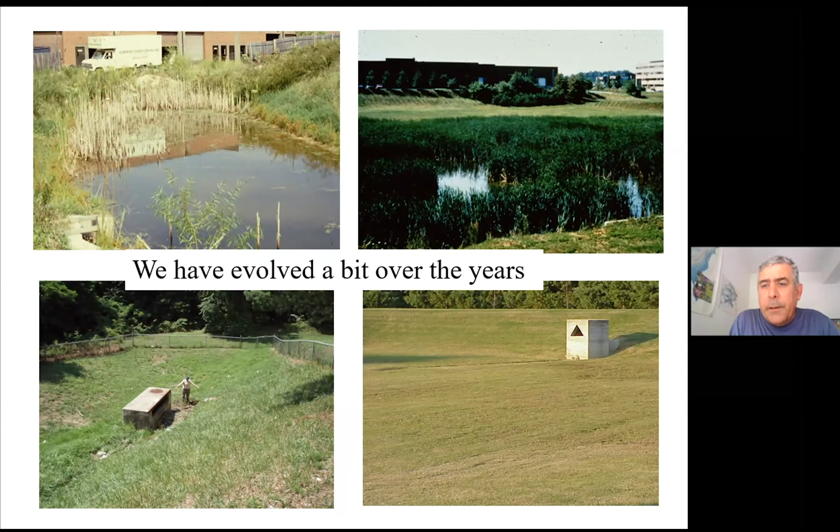My creds, when it comes to stormwater, I was involved with many other colleagues in putting together the Minnesota Stormwater Manual back in the day.

We've also worked on the Maryland Manual, Delaware, West Virginia, Seattle, all sorts of places around the country, even in New Zealand.

And this is one of my favorite graphics. It's kind of the unified stormwater sizing approach that we advocated for Minnesota, with different volumes for water quality, channel protection, and overbank and extreme flood protection.

If you look at it really closely for too long, it goes back and forth. It's like an optical illusion.

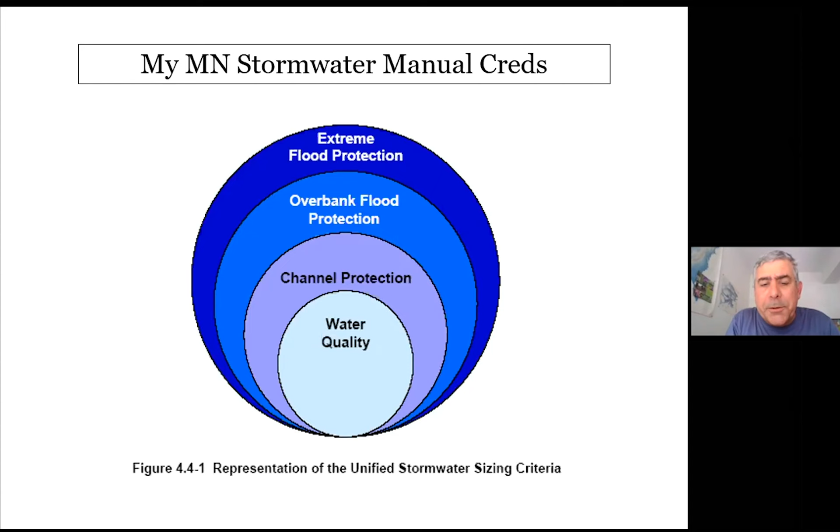So anyway, what prompts us to revisit our design standards every decade or so? It's kind of interesting. We generally change our landscapes or even refurbish our living rooms at the same basic pace, about once every 8 to 10 years. There's a lot of reasons for it.

Often we need to update our sizing criteria, that we get new design storms to reflect a better rainfall record or better forecasts, and a shift to more precise engineering models.

It's also the opportunity to incorporate new stormwater practices and fix problems with old ones, and renew the arguments about how much quality versus how much quantity.

Whether we want to promote infiltration everywhere or deal with the failures of some infiltration, whether we want to increase the size of the contributing drainage area or reduce it.

And generally, a lot of the decisions that are made in the manual writing process reflect our dissatisfaction with our stormwater product that we see out there.

Facilities that are hard to maintain, facilities that don't seem to be performing their water quality function, and facilities that just don't look aesthetically appealing.

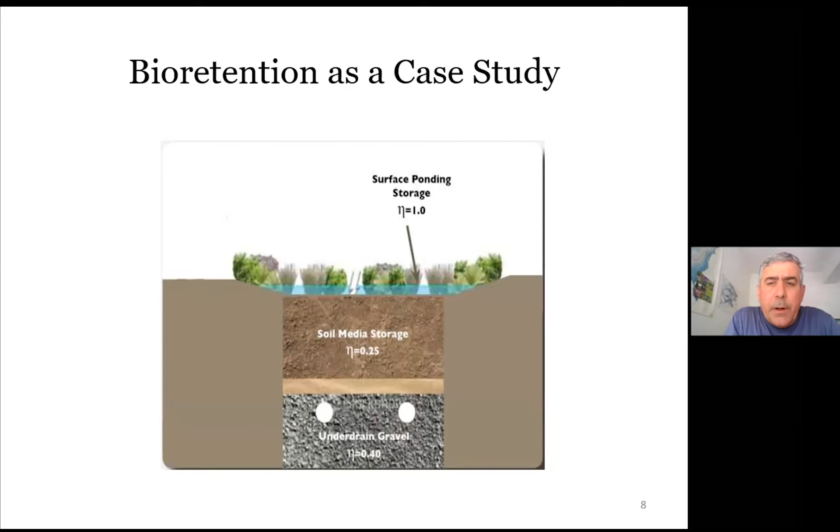And we've also had opportunity to do a good amount of research on it. Our research in the last few years, we understand a lot more about bioretention.

It was really just a black box when it was first introduced in the 90s and even through about 2010. But now we have much better information on how much runoff reduction it produces on an annual basis in terms of the volume reduced.

We have much better data on pollutant removal, and in particular, the components of bioretention that increase or decrease performance for different kinds of pollutants.

For those of you who know us in the Chesapeake Bay, we are incredibly nutricentric. We worry a lot about nitrogen and a lot about phosphorus, and that's our primary goal.

But we've also learned about how they're good at removing trace metals, toxics, sediments, and others.

On the other side of the ledger, we have our operational experience, which is the experience that we've seen of the product out on the ground. And we find which design elements are problematic.

We do more inspections now and find consistent problems that turn up in application after application. When we look at the entire cycle from concept to construction, we find there's certain steps in that cycle which are more critical or at least more prone to failures.

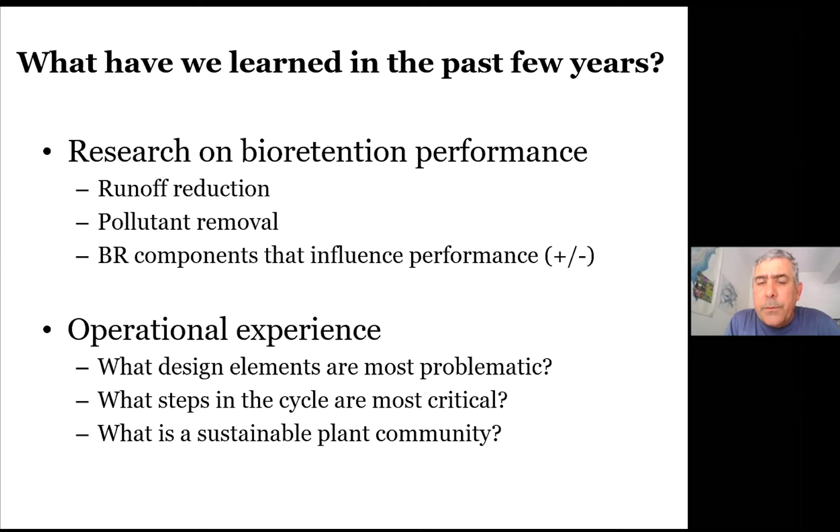Just to amplify some of the points, I think the big shift in the last round of stormwater manuals was the adoption of runoff reduction targets and the notion that our ability to infiltrate, evapotranspire, or filter over a long time can really reduce annual runoff volumes by 40 to 70%, depending on the underlying soils. And that is really driving the pollutant removal performance and the operational performance of bioretention and all of the similar practices.

There's also been quite a bit of work with upturned elbows and internal water storage zones that can further boost how much runoff reduction occurs at the bottom of bioretention areas. And that was a little bit of a wild area 7 or 8 years ago. It's now pretty well accepted, and it's been implemented in a majority of new projects, but has yet to go into the specification where it's required. So that is probably something that will be a major focus of our next round of improvements.

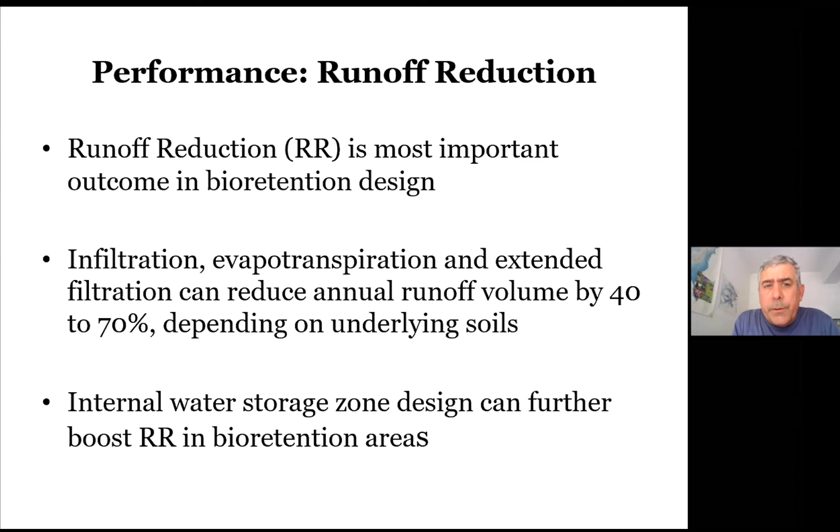The other thing that we've learned, and this is a slide I borrowed from my colleague Allen Davis at the University of Maryland, who will not be playing Michigan State this weekend, which is breaking news for us because of COVID.

But the issue with bioretention, and for that matter almost all of our traditional gravity-driven BMPs, is there are not a lot of mechanisms outside of denitrification to get a lot of nitrogen removal in our standard design. What we end up doing, the research shows, is we shift or repackage the forms of nitrogen back and forth. But until we get it into nitrate and then have denitrification occur, we don't get reliable nitrogen removal. So a lot of our design efforts are trying to figure out how we can provide a more reliable environment for denitrification to occur.

And realizing that in the upper Midwest, nitrogen control is probably not as important as phosphorus control, it may not be as big an issue as it is for you. But for all of our urban BMPs in our bay restoration effort, it's really tough to get the nitrogen out.

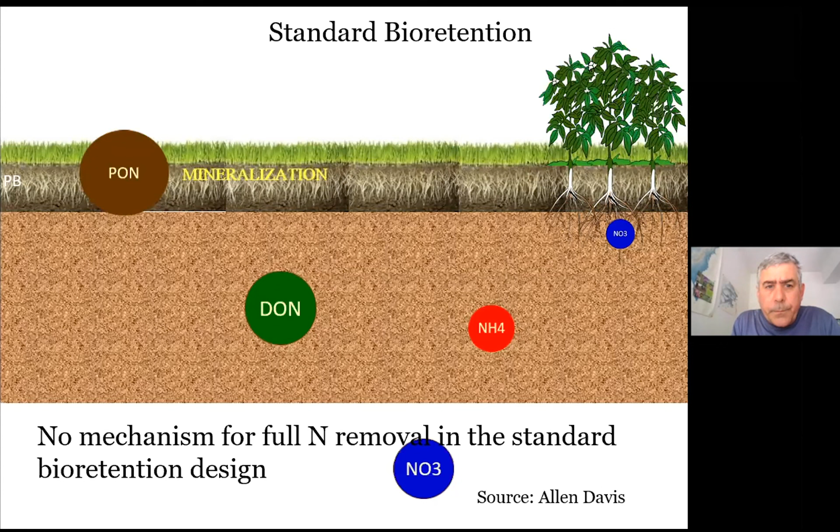And there's been a lot of work on alternative media recipes for bioretention and other practices, including sand filters. The current media recipe for us, which is about 85 to 88% sand, meets our performance objectives, but there's been a great deal of work, much of it inspired by work from Minnesota, adding things like biochar or wastewater treatment residuals to see if we can boost the performance. We call them performance enhancing devices. And the boost in removal rates is usually greater for phosphorus than for nitrogen.

And so this is probably an area where our next generation of specs will have more media complexity in their recipe to add some PEDs. The main limitation to moving forward on this is the reliability of the supply of the PEDs to the contractor community. Until they show up as hard and fast requirements in specs, there's not enough of a market to produce them in the quantities needed to be cost effective and applied across.

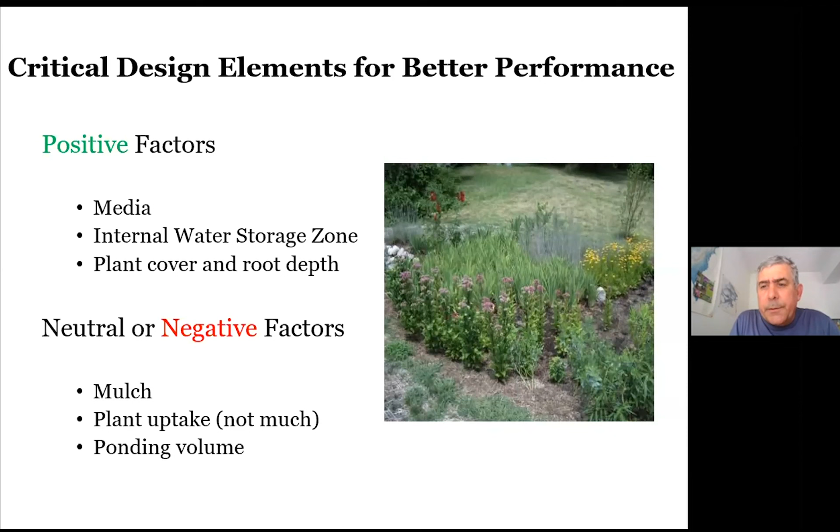And then, of course, we all have our collection of knucklehead designs. Mine are drawn from around the country, but we're still trying to figure out how we squeeze in stormwater and get the performance. And so those kind of design specs and limitations and setbacks and so forth need to be re-examined and in some cases be made more mandatory.

The big choice whenever you write a stormwater manual is whether you use the word should or use the word shall. If you use the word shall, it's interpreted that you've got to do it. If you use the word should, yeah, I'll do it if I want to, but in most cases, I'll go for a lower cost alternative. So making those choices, I think, is something that will go.

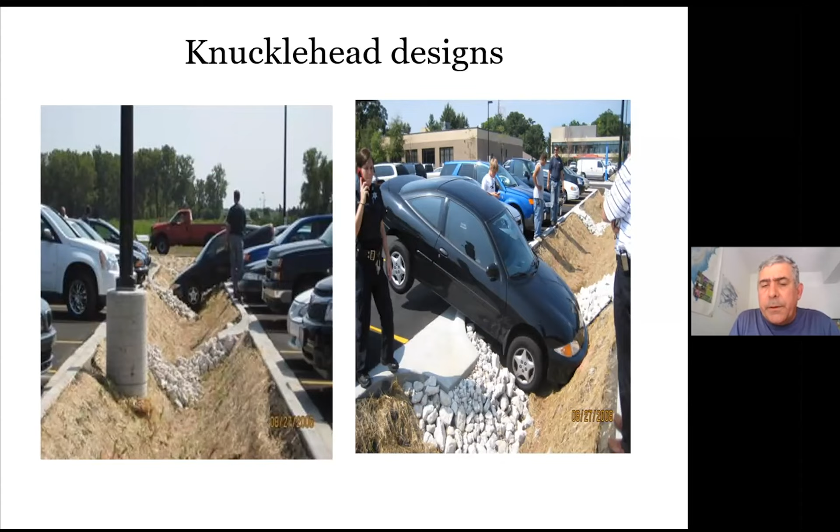But the one thing that we're promoting is a kind of a full cycle approach where we look at our monitoring data and try to assess how they're functioning, set forth performance standards for what we want our facilities to achieve, then outline the more specific design criteria that lead to meeting those standards, to have more specific construction techniques as we shift over to, particularly with bioretention, more of it being constructed by landscape contractors and not our traditional big civil firms.

We're looking at more numeric inspection criteria to basically trigger whether a facility passes or fails, and if it fails, what specific maintenance tasks need to be done to restore its performance, and when it totally fails, the makeover stage to recover its performance, in many cases just redoing the practice.

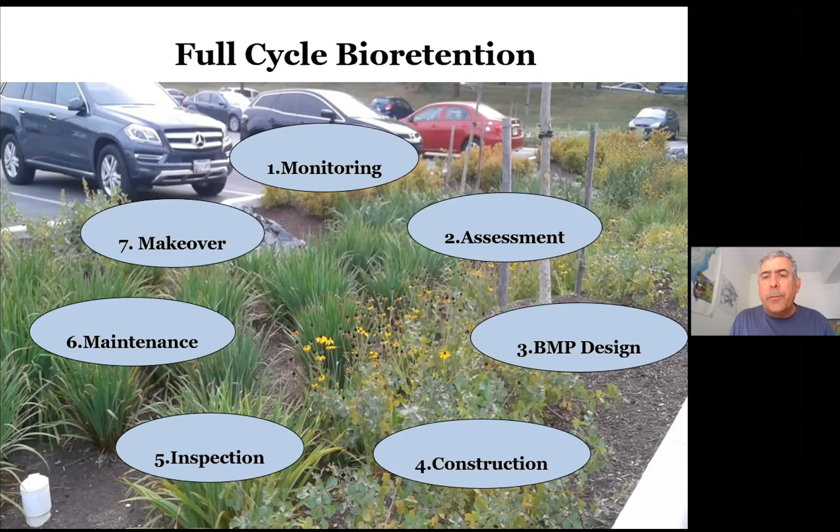And the whole concept of a sustainable stormwater practice is that we can say, like a sewer line or a drinking water treatment system, how long will this last? Will it last 50 years and still perform? And I think the big question for many of us, and it's not a big secret, is our practices may physically last for 20 or 30 or 40 years, but their performance may disappear after 10. So we need to look at the duration of performance as a key metric of sustainability.

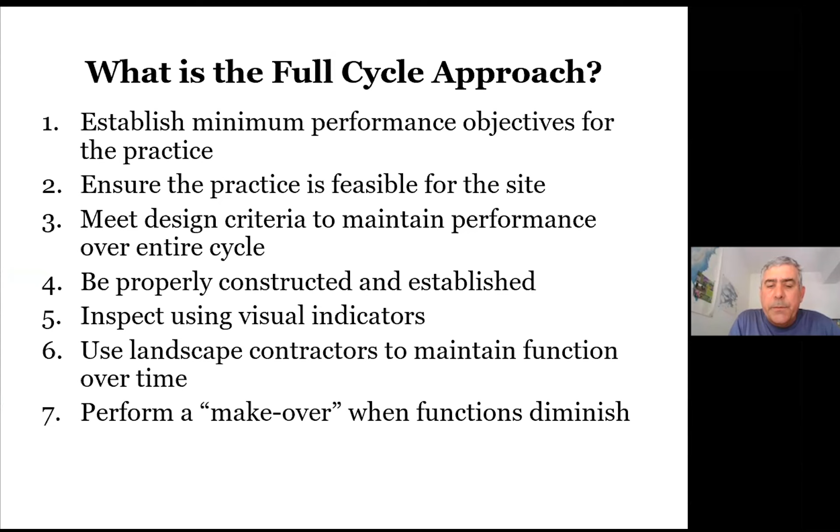So anyway, just writing what I was just talking about: establishing minimum performance objectives that control design, have specific metrics for practice feasibility, have design criteria that are more weighted to maintain that performance over the entire cycle, using landscape contractors to maintain function over time, and then what do you have to do when the functions diminish to do a makeover to bring the facility back into compliance.

So some of the targets, and I think this is where the arguments about the next generation of design come into play, is we want to consistently achieve a numeric performance standard. For example, with runoff reduction, that we would like at least half of the stormwater volume going into the bioretention area on an annual basis to disappear, either into the ground, into the sky, or well after the storm event is over.

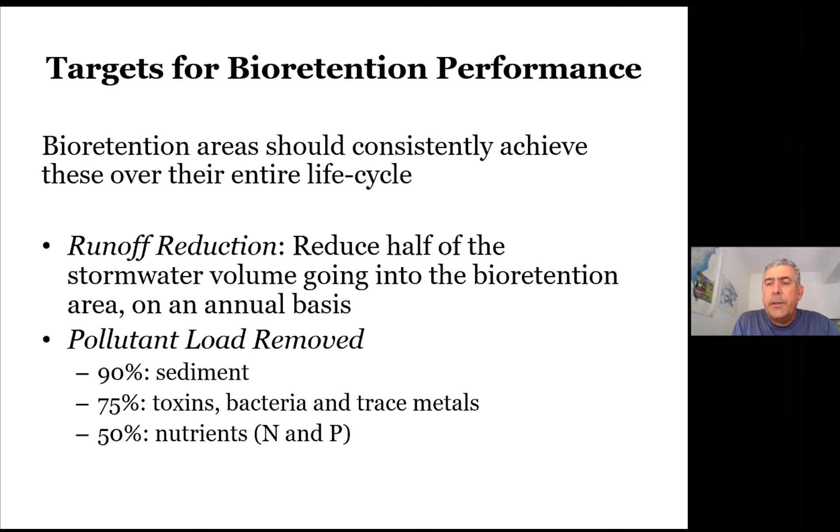In terms of pollutant load removal, we feel we can get the following removal rates, which really haven't changed that much in the last 10 years, but I think the one thing we have discovered is we were concerned about the possibility for release of nutrients and even trace metals, but it does seem that the material is being locked up, and so hopefully over 20 or 30 years, the pollutants are accumulating but not leaving the facility.

Some of the more prosaic performance targets: we want plumbing that can last a decade or two without failing. It's things like underdrains. We find consistently the inflow to bioretention areas, whether they're curb cuts or something else, is a critical point of failure in many, many, many facilities. We want a sustainable plant community that can withstand Minnesota winters, improve practice function, and create some legitimate habitat, even if it's just for pollinators.

We've come to realize that there's not a maintenance fairy out there, that we have to figure out as a society how we maintain LID practices. And what we've come to in the Mid-Atlantic is a reasonable maintenance burden that can be handled by trained landscape contractors and not necessarily hardcore engineers.

And as I've mentioned before, numeric triggers to define failure and require makeovers. I think we've been doing this for long enough where it's time to insist and impose those the same way you would have in a drinking water or a wastewater system.

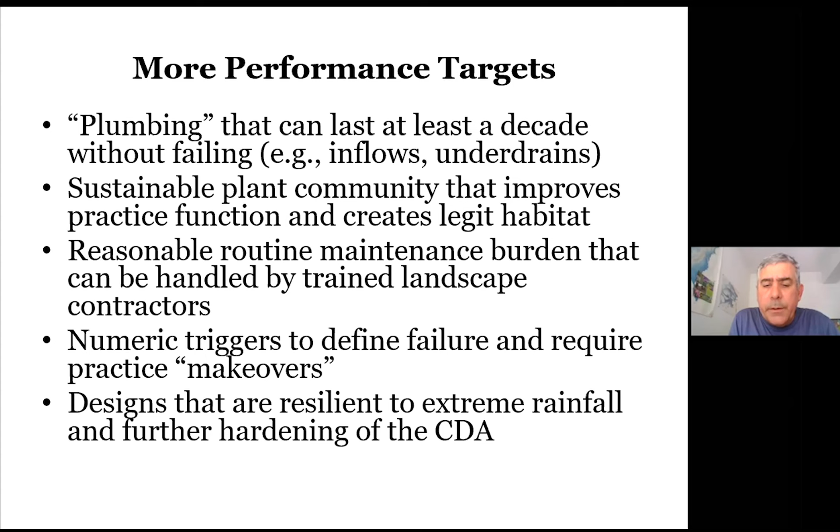So the visual indicator approach is a rapid way. We've been putting a lot of numerics on it. Our website, www.chesapeakestormwater.net, has a lot of resources for it. I won't belabor them this morning.

The one spec, though, I think that comes out is coming up with a bioretention inflow method that works and can be easily cleaned. Perhaps some kind of pre-cast concrete curb inlet that prevents erosion at the entry side slope and reduces flow velocities to non-erosive levels in the bioretention bed.

I think that is a piece of standardization of the plumbing that would be very welcomed by the design community and the construction community, and would eliminate about 30 or 40% of the observed maintenance problems out there. So for some graduate student, getting a Nobel Prize in bioretention inflow would be a great way to go.

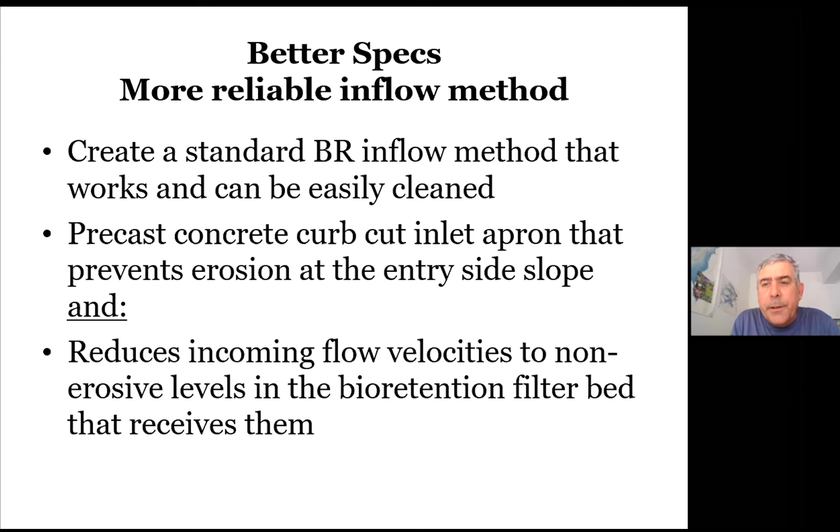Better specs for landscaping. We're sort of torn on the mulch tree model, as I mentioned before, and the landscaping objectives and invasive plant species, and how do we maintain them. And I think we never really invited landscape architects to the table on this, which is something we should do in the next round. But we want to have sustainable landscaping templates that are easier to maintain and require less mulch.

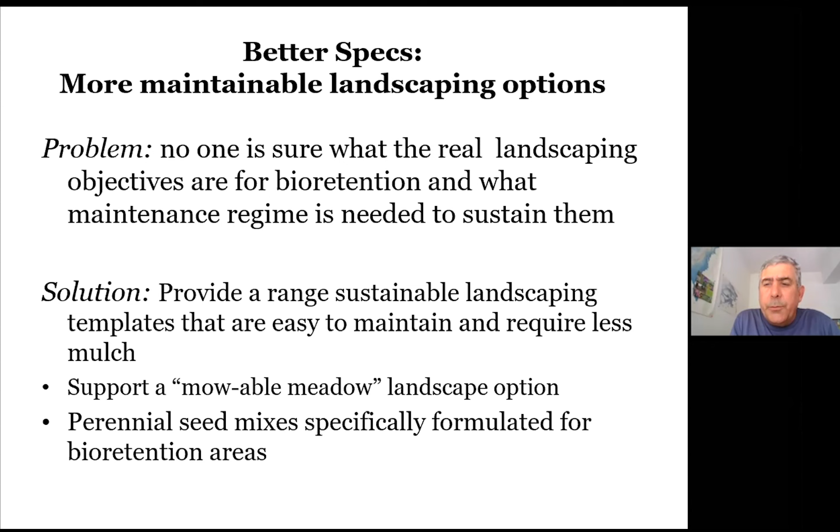I've been shifting to what we call a mowable meadow landscape that is seeded with perennial seed mixes formulated for the rather dry conditions in the upper levels of bioretention areas, and that grows up and is mowed roughly twice a year, making the maintenance a little bit easier than having to weed, replace mulch, and so on.

And again, the biggest post-construction maintenance cost traditionally has been mulch, and this is a way to do it. And we have to understand that our landscaping crews know how to maintain, they know how to mow. And so that's something just to throw out there.

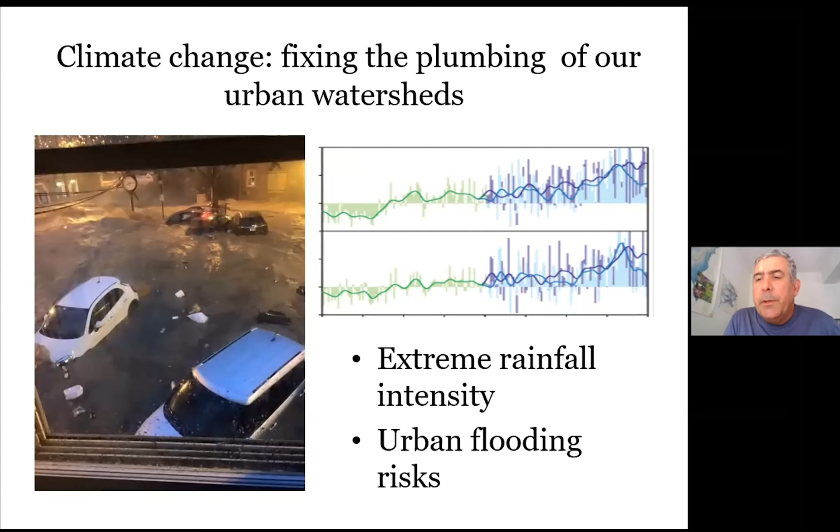Urban flooding has really increased in the public's eye in the Chesapeake Bay and elsewhere. How do we manage that? We've always tried to manage a lot of different kinds of storms, but I throw this slide up on the right-hand side. You can see in the Bay watershed, there's a very large increase in very heavy precipitation. It's sort of similar to what you have. I think you're at 37%, we're at 71%. But that's probably the big climate change thing that we're focusing on the most.

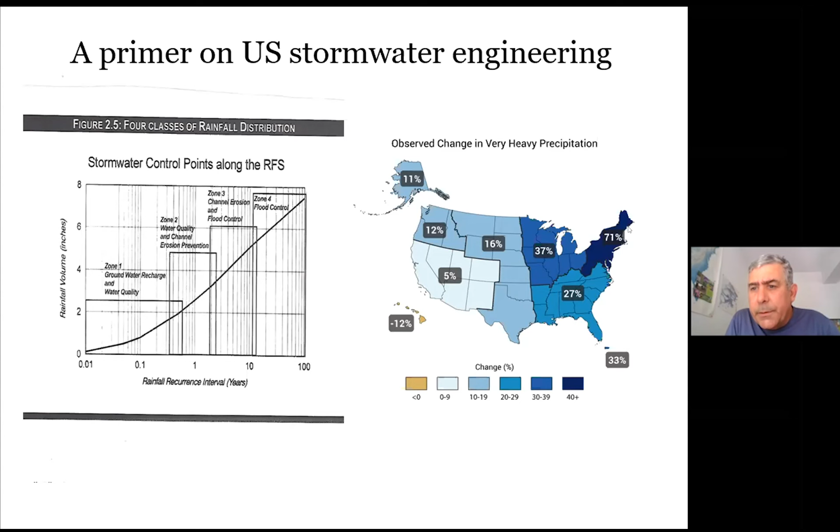And I'll turn it over to David to bring this home. But just in closing, I think we have a lot of great opportunities to clean up our profession, to produce better product, and we just need to get back and do it the old-fashioned way, which is to work together to improve our design criteria to make those sustainable stormwater practices. So with that, I'll stop and turn it over to David.

Thanks, Tom. So I'm going to kind of pick up where Tom was leaving it. I'm going to talk a little bit about what we're looking at in terms of climate change conditions and how that might impact our stormwater design moving into the future, the way that we're approaching it in the Chesapeake region, and then talk a little bit about some of the other practices that we're using outside of sort of the traditional stormwater BMPs in order to meet some of our pollutant reduction goals in the region.

So, as Tom mentioned, we are tackling how these changing climate projections are going to influence the way we design our BMPs to make them more resilient. In our region, we have done a number of analyses. The Chesapeake Bay program did a pretty extensive climate assessment last year, and we've been working to compare that with the findings from the Intergovernmental Panel on Climate Change, the National Climate Assessment, and some other local university studies. And there's pretty good consensus that we're looking at 2 to 3 degrees of warming in our region by sort of the middle of the century.

Similarly, we're looking at between 1 and 2 feet of sea level rise by that time, including influences from sort of blue sky or sunny day flooding, tidal flooding, which has increased by a factor of 10 over the last 50 years or so. On the precipitation side, in terms of overall increase in volume, we've got a projected 6.5% increase in precipitation volume by middle of the century, sort of as a Bay watershed-wide average in the Chesapeake. But the intensity of those storms is also increasing.

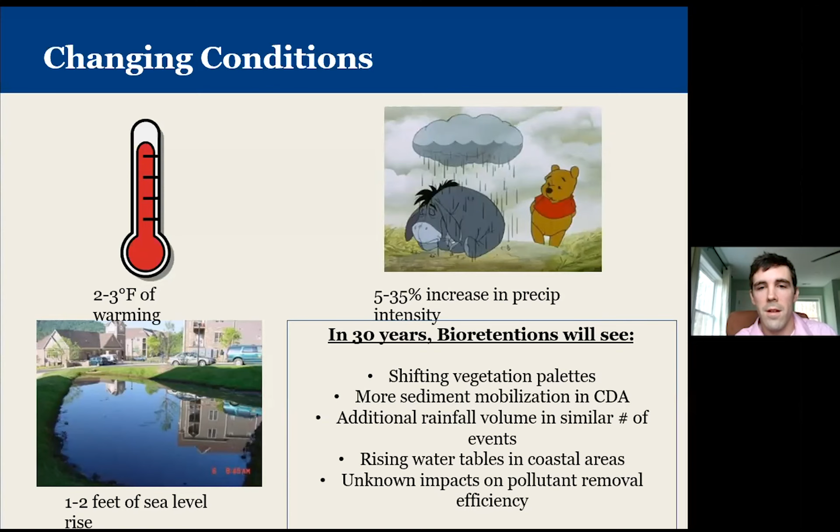So what we're doing right now, Tom, if you can go to the next slide, is looking at vulnerability of our practices in particular as a way of trying to understand how we can improve design into the future. If we can, I don't know if it's a lag on my end or.

Okay, thanks, Tom. So, we're looking at our practices again, using sort of our upland LID or bioretention practices as a case study here. Where are the practices vulnerable as we move into the future to climate change? Because a lot of these practices are already being subjected to conditions that are making them fail even under current climate conditions. So, in that sense, their risk is relatively high.

Bioretentions are a relatively needy practice when it comes to maintenance, whether it is existing design flaws related to an undersized practice or short circuiting of the flow through the system. Maybe it's a curb cut that was undersized, so you get kind of a fire hose effect coming into the practice already. They are already facing challenges that are most likely to be exacerbated going forward. And our online practices that are sort of within that natural flow path, they're going to be the most susceptible as they kind of face the brunt of those additional flows.

We're looking at, in particular, erosion, both at the inlet and the outlet of these practices as being particularly vulnerable to these increased intensity events. Or perhaps, depending on the design, bypass or overflow becomes a concern when we're looking at what their performance is able to achieve. If we have more rainfall, but it's being concentrated into the same number of events, it increases the likelihood that a significant portion of that additional runoff is going to miss our practices altogether. It might protect them from some of those maintenance needs, but it might mean that we are now having more

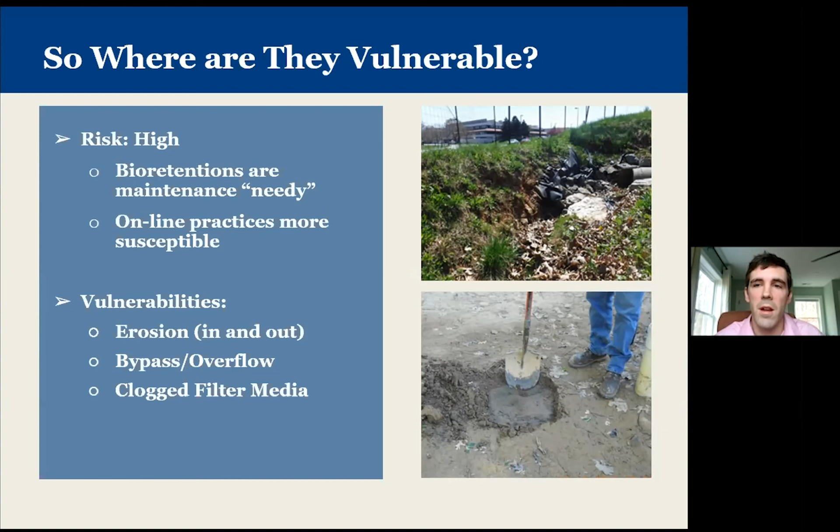untreated flow entering our conveyance systems and networks. We also expect with that additional sediment mobilization in the drainage areas to get more clogged filter media, depending on what the pretreatment conditions are. And again, some of these might just be loss of performance types of metrics in terms of what we're looking at rather than absolute failure, but it also is likely to increase kind of just those routine maintenance needs for these practices, which has already been a significant burden for a lot of our localities around the Chesapeake Bay watershed.

So we have a lot more work on this front that we've been doing at the Chesapeake Stormwater Network and through the Chesapeake Bay Program Partnership. We have a series of 4 memos that we've been working on. If you're interested in more details on this, 3 of them are out already. The 4th one will be coming hopefully in the next month. The first one is really, we went around and surveyed about 200 stormwater stakeholders across the watershed to look at what their real concerns and current management actions have been to address the resiliency of their stormwater practices, and condensed those findings into a memo to kind of lay out the needs for the program.

The second one really lays out for a lot of the kind of modelers and scientist folks in the Bay Program structure, what is the current stormwater engineering standards and criteria that are being used across the watershed. It's a very state specific and in some cases locality specific or department specific type of criteria. So understanding how those are set up and designed, what are the precipitation data that are being used to inform those designs, so we know what we're working with sort of from a regulatory standpoint.

The third memo pulls together all of the recent climate projections and research for the Bay watershed. It summarizes those temperature, sea level rise, stream flow data, as well as a series of 5 different downscaling studies that have been done for precipitation to try to lay out sort of the range of expectations and some of the methods. And then the fourth memo, which is coming soon, talks more specifically about those vulnerabilities for our BMPs. Sort of what are the elements that make them most vulnerable? What are the design components that we need to be looking at in that next generation design? And then hopefully that'll inform future efforts to kind of move towards better design criteria for the states, or at least a commitment or agreement to kind of look at ways to improve our practices in the watershed.

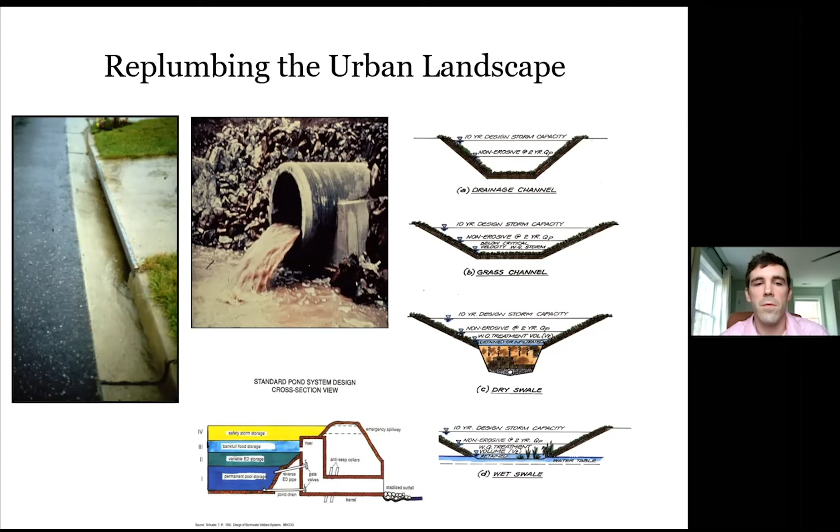We've been doing a lot of work to get localized or regional intensity, duration, frequency curves that are projected into the future, in case localities want to look at increasing the sizing of their conveyance networks or their stormwater practices to account for future precipitation. But there are also ways that we can look at media, those performance enhancing devices that Tom mentioned, to try to improve performance, to kind of make up a little bit of ground that maybe we're losing from some of our bypass or untreated runoff, as well as some of those inlet and outlet protection systems that we might be looking at, whether it's the precast inlet for improving maintenance or creating a little more standardization, or what we need to be kind of looking at some of these methods so that we can figure out a watershed-based approach to improve our resiliency.

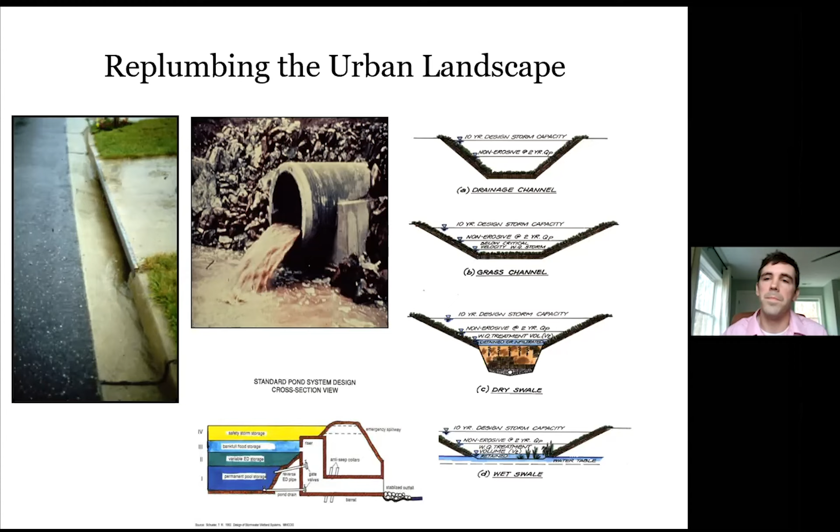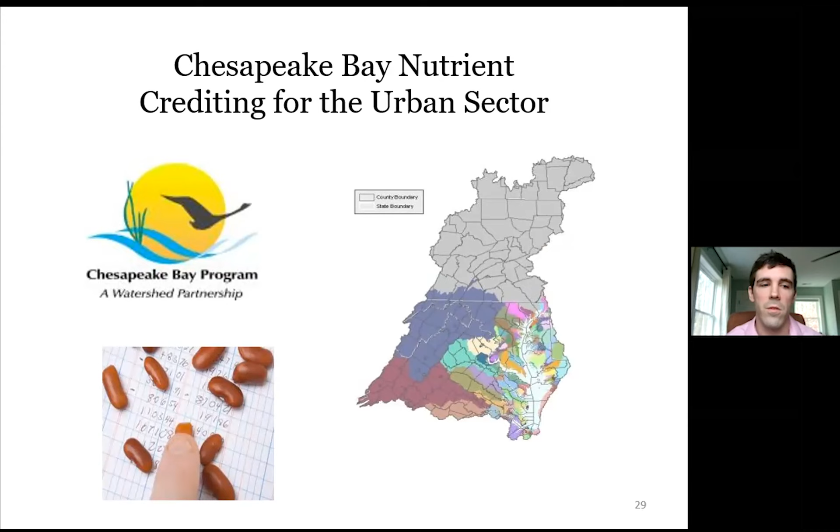Shifting gears a little bit, I also wanted to cover what we're doing in the Chesapeake Bay watershed on other BMP fronts beyond just our traditional stormwater practices. As many of you know, we're very nutrient-centric in the Chesapeake Bay, as a lot of our implementation is heavily driven by the Chesapeake Bay TMDL goals of reducing nitrogen, phosphorus, and sediment. So there's a lot of bean counting that goes on, and a lot of different tools now in the toolbox that we have to revisit regularly to make sure they're keeping up with the latest science on removal efficiencies we can achieve with these different practices.

For a full recap, I'll hit on the highlights. The process we go through is what we call the expert panel process. We've been doing this since about 2013, and since then we've covered over a dozen different practices. It's a really complex and consensus-based process, which can drive us crazy at times, but I think in the end it typically results in practices that are well vetted and have buy-in from all our different partners, so they can lead to changes in design manuals and guidance from the state level that drives a lot of the guidance for MS4 permittees. More of those resources are on our website, linked to the page.

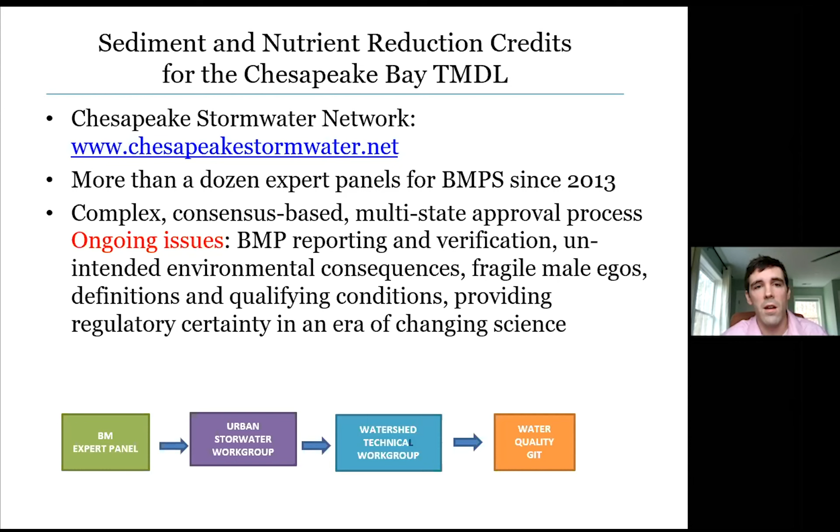This is a list of those practices. On the left are what I'd call our major BMPs - the ones far and away most often implemented by the states across the Chesapeake. Our new and redevelopment project BMPs, our traditional stormwater practices, are the foundation for a lot of these programs, but in recent years urban stream restoration has really taken off in our region. It has become possibly the most popular new BMP, if not overtaking some of our traditional stormwater practices - at least in terms of the amount of air time it takes up in meetings.

We also have stormwater retrofits for our older practices, urban nutrient management - what we're doing in terms of fertilizer application, both from a legislation standpoint as well as localized implementation of urban nutrient management plans on municipal lands or parcels. Street cleaning is one of those programs as well. We have nutrient discharges from gray infrastructure, which is like an IDDE plus type of program. And then we have what we tend to call boutique BMPs - contributors that might be good for a few pounds here and there, but generally aren't the basis of the program. That's our tree planting BMPs, septic system upgrades, shoreline management, and things like that.

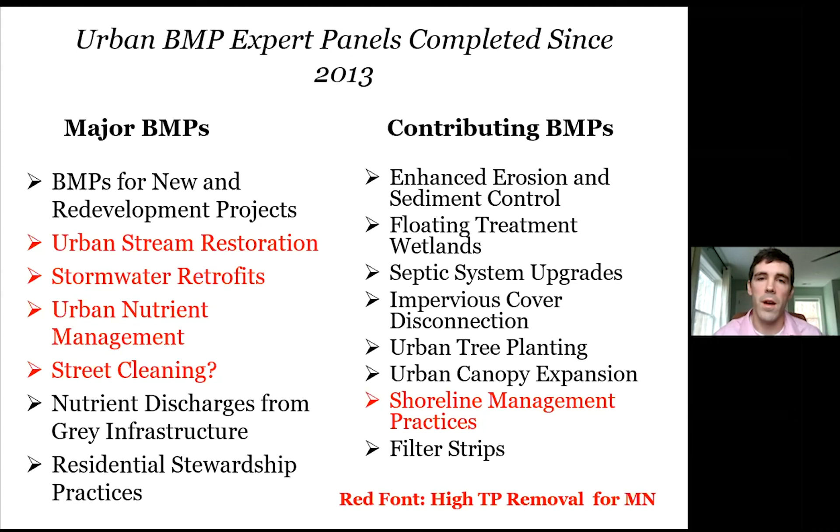Stream restoration is what I want to talk about a little more to wrap things up. In addition to the work we've been doing on climate resilience, stream restoration has been our other big project over the last, I guess almost 2.5 years now. Something we thought might be a 6 or 8 month endeavor turned into 2.5 years, but I think it just speaks to the demand there is for improving practice that is really taking off.

It's become, as I mentioned, like a $1 billion market now across the public and private sector in the Chesapeake Bay watershed. It's highly used, with hundreds of miles already built, and hundreds and hundreds more in the pipeline projected to be implemented by 2025. So we needed better standards for both understanding the reductions coming from these practices, but also what they're doing after construction. What is our verification procedure for stream restoration? What are some considerations for other environmental impacts aside from the pollutant removal performance we're looking at?

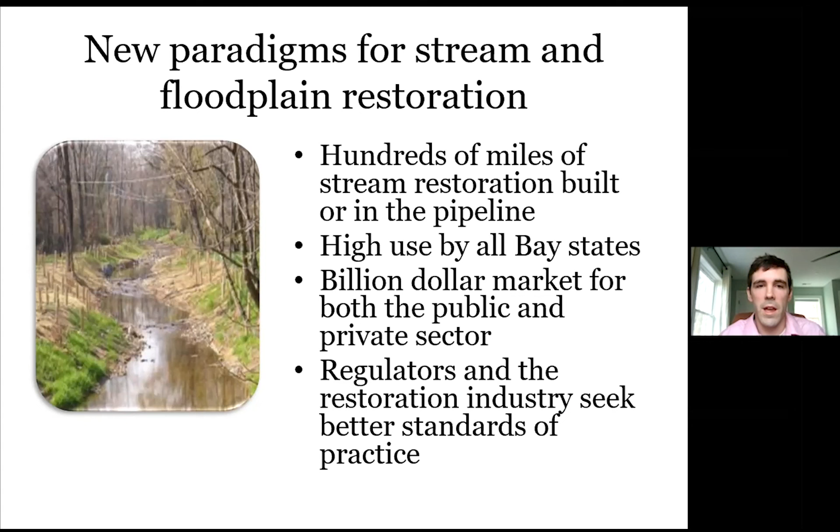We created a new protocol specific for crediting nutrient and sediment removal from outfall stabilization projects. The dynamics of those, where they're very vertically driven in terms of their erosional processes, necessitated another method for calculating the prevented sediment erosion.

We also revisited the existing ways we're calculating pollutant removal, which we call Protocol 1 for prevented sediment. Then we had Protocols 2 and 3 that included practices designed to reconnect the channel with the floodplain. The result was this series of practices and reports. We kind of like that nice round number four, so we ended up with four reports to cover those. The link is on the page here if you wanted to dig into those in detail; I'll just quickly go over the highlights.

But before I get into that, I want to talk a little about what would be, at least in our opinion, most exportable to Minnesota. I think there are a lot of nuggets that can be really useful throughout these reports.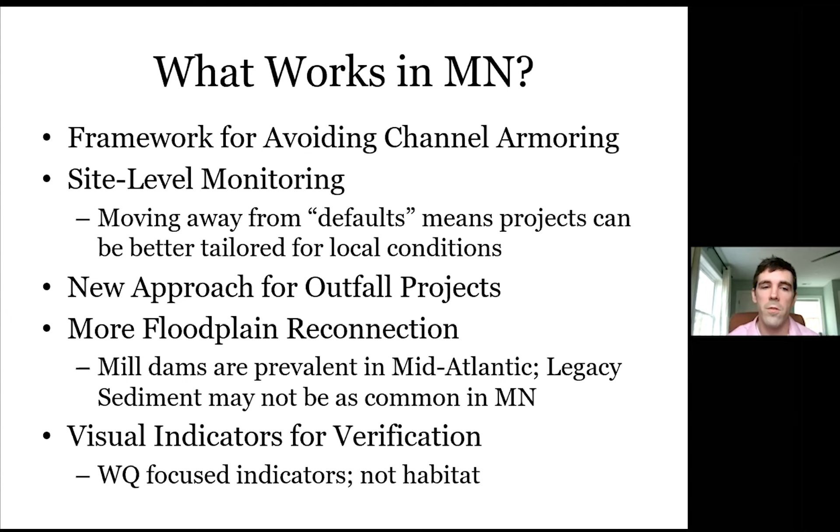In the floodplain reconnection category, we have a lot of mill dams across the mid-Atlantic, so there was a lot of effort directed toward legacy sediment removal to address the accumulation of legacy sediments in the floodplains. Based on conditions in Minnesota, with more glacially carved stream valleys, I don't know that that's as exportable to you all. That said, there is interesting information on techniques being used in the region, as well as visual indicators, which I'll talk about on the next slide.

With maintenance considerations, going back to Tom's point about establishing numeric thresholds that trigger maintenance or corrective actions, we wanted to do something similar with stream restoration, while understanding these are designed to be natural systems that can adjust to some extent on their own after construction.

So there's a little wiggle room, but what we wanted was criteria with a couple of visual indicators that someone who wasn't necessarily an engineer could use to walk the site, walk the reach, identify those indicators, and have that trigger a specific management result: is there a major compromise, in which case we need to reduce the credit or take corrective action to restore performance, or is there a level of failure where we need to walk away from it—trying to trigger those decisions for localities.

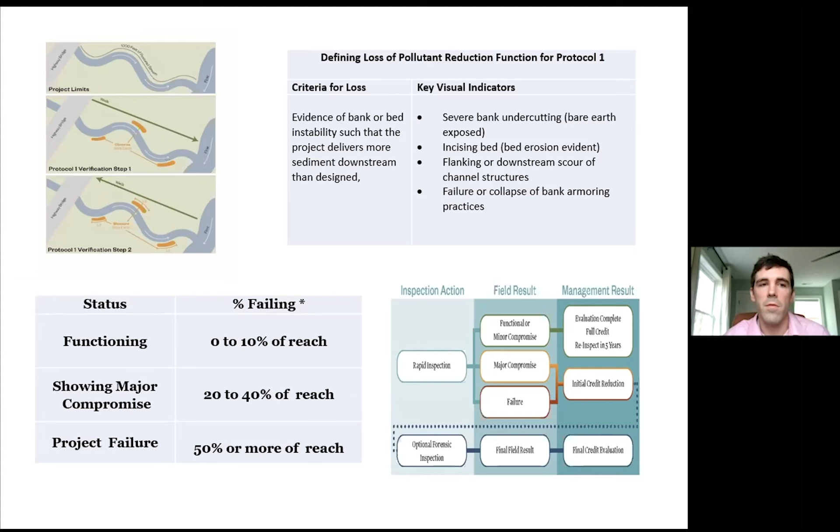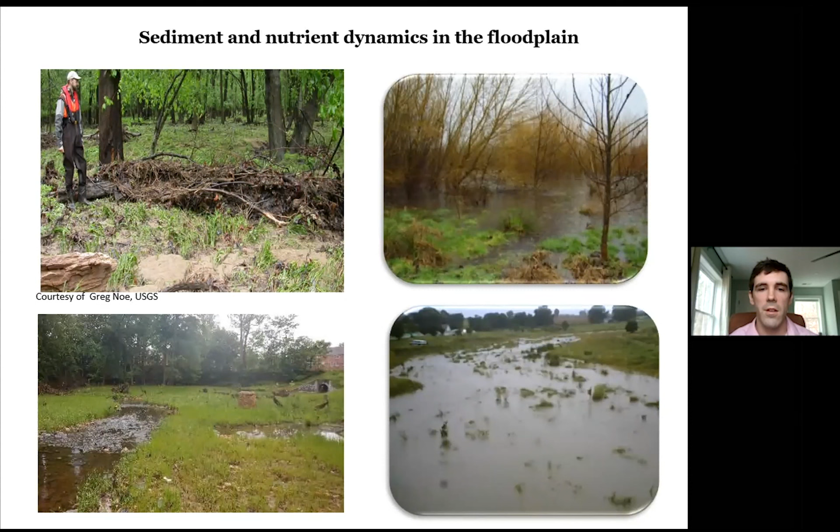We also had a lot of updated research on sediment and nutrient dynamics in the floodplain. There's been a significant shift toward floodplain reconnection practices in our region—different methods for getting water out onto the floodplain, taking into consideration, based on channel design, how much of the annual flow is actually accessing the floodplain, and how factors like the height of the floodplain surface, vegetation conditions, and soil textures influence what we're seeing in terms of denitrification.

So just to wrap things up, I mentioned these different approaches we're seeing to floodplain restoration. The top graphic shows a traditional legacy sediment removal, where you're lowering the floodplain to promote more reconnection, more channel flow getting out onto the floodplain for smaller storm events, to improve trapping and attenuation as well as denitrification. We also see a good bit of raising the channel bed to promote more reconnection and address those really incised stream banks.

And so we laid out qualifying criteria and considerations that folks need to address for each of these approaches.

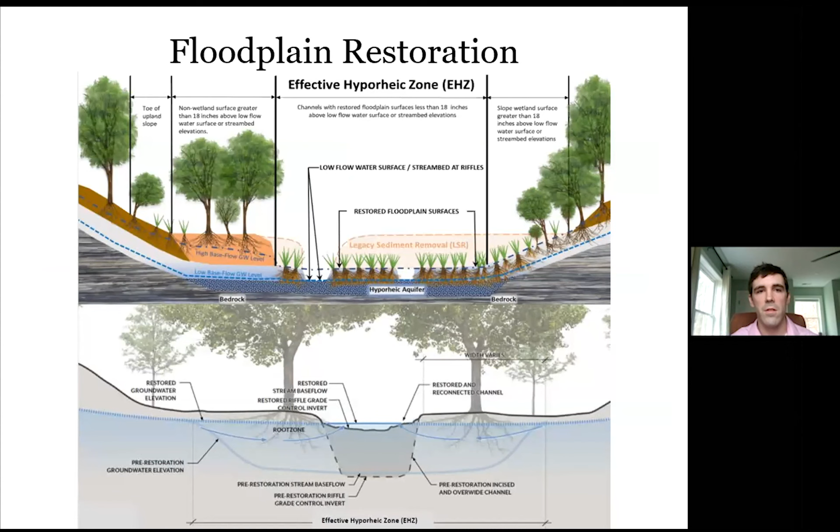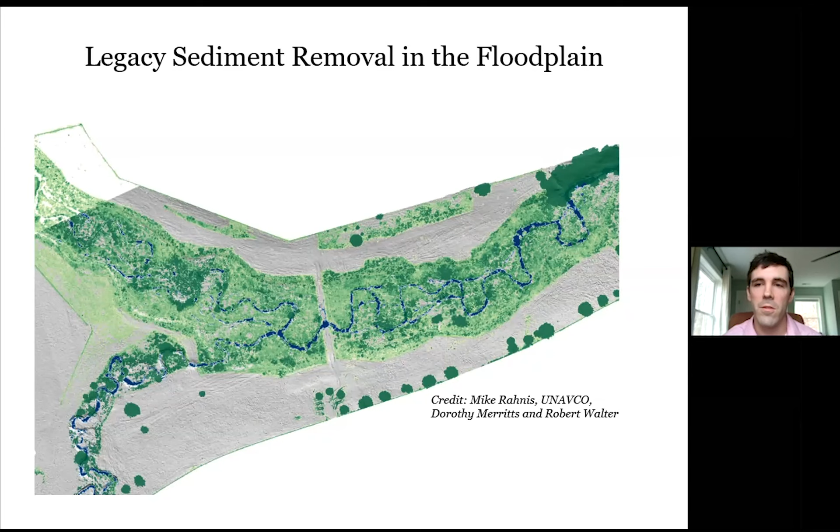So I already kind of mentioned this, so I'll leave it there because I see a little number 24 for questions in the chat box. This was my last slide, just the focus we've had on each of these practices in stream restoration as we move into the next generation, because we're seeing more diverse approaches to addressing watershed pollutant loads in our region. So thinking beyond just our traditional stormwater practices when considering the next generation of design is important. I'll end there.

Thank you, David and Tom. That's applause from one participant, but I'm sure it reflects all the participants, all 145 of us. We only have time for a couple of questions. The first one comes from, I've got to find it...

From Mike Trojan: there's a lot of great info on design, O&M plans, etc., coming out of research from other sources. How are you getting info out to people? Manuals work to some extent, but they have limitations in terms of outreach. So how are you getting other techniques besides manuals? How are you getting information out to people?

That's a great question. We have this 11,000 person network of engineers and stormwater stakeholders. We provide them webcasts like you all do, and they're very important. We do training workshops, or we did before COVID hit. We have our website, and every other year a Baywide stormwater retreat to get our folks together. So it's a combination of multiple outreach techniques to showcase the new stuff and innovations that are driving better stormwater design.

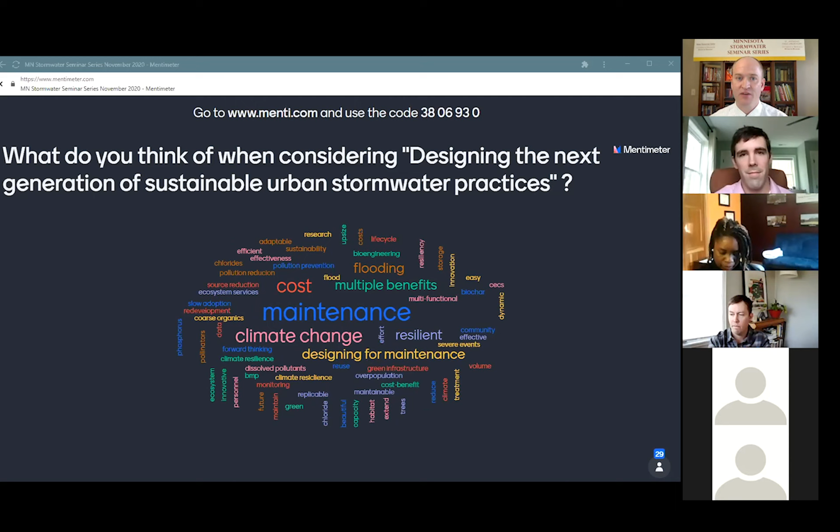Welcome back. I will now start the panel discussion. I'll begin by introducing each of our panelists, and if I can ask them to turn on their screens as we go through here. It's my honor to have our panelists today for this discussion. We've already had a lot of really great questions, and I'm excited to use the word cloud as a basis for that discussion. To start, I will introduce our first panelist. His name is Jay Riggs, and he is the district manager at the Washington Conservation District. So Jay, from your perspective and experience, how do you relate to this topic today?

Thank you, Eric. I appreciate the opportunity to be here. I just want to first off say nice work to Tom and David. It's always a pleasure to hear their perspective. And just so you know, Tom, I did smile or chuckle at almost all of your jokes. As a virtual presenter, it can be frustrating sometimes not knowing how well your audience is reacting. So I didn't officially guffaw though, so just FYI, you may need to work on your delivery a little bit, Tom.

The Washington Conservation District works with federal, state, and local partners to implement our conservation programs. And we work with both urban and rural landowners, are bordered by two large river systems, and have a very geologically and ecologically diverse landscape. Accordingly, we are continuously looking for ways to implement the practices and programs that work and adopt new and better approaches to address these challenges. Luckily, I personally have been able to work with a number of very smart and talented professionals to help guide my perspective on this, many of whom are here today. And I want to thank all of you. You know who you are.

And the WCD is also working to improve and implement intensive prioritization efforts, which actually are originally based on protocols developed by the Center for Watershed Protection, to identify where we should focus our efforts. So we appreciate learning from Tom and others for their pioneering efforts to improve our approaches in Minnesota, and I look forward to the rest of this discussion. Great. Thank you, Jay.

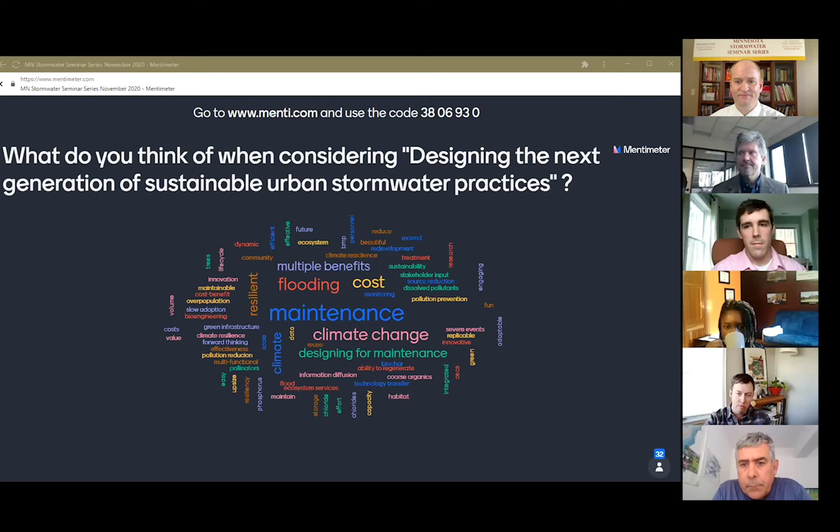To add one other comment to that, Andy, as we build out these downstream flood control BMPs or systems, but continue to work upstream in the watershed on water quality projects that also retain water, that gives us more resiliency for those downstream systems.

Yeah, what I hear from all this is we can't put all of our eggs in one basket, right? We can't rely on one type of practice or one solution or even one location to satisfy even just one of these goals. We can't solve all flood control with one pond or a series of ponds. We need to have a diversity of practices throughout the landscape, throughout the watershed,

to all play a part in all of it. We should be thinking about all the goals and trying to achieve success through a multitude of ways, so that even if and when, not if, but when one or more of these fail, it doesn't ruin the system. There are many, many working parts. So that's what I hear out of that.

So taking that concept, I want to ask a question about sustainable. Sustainable is in the title, Sustainable Urban Stormwater Practices. So thinking about the word cloud, thinking about the discussion we've had, what does it mean to be sustainable when we're talking about urban stormwater practices?

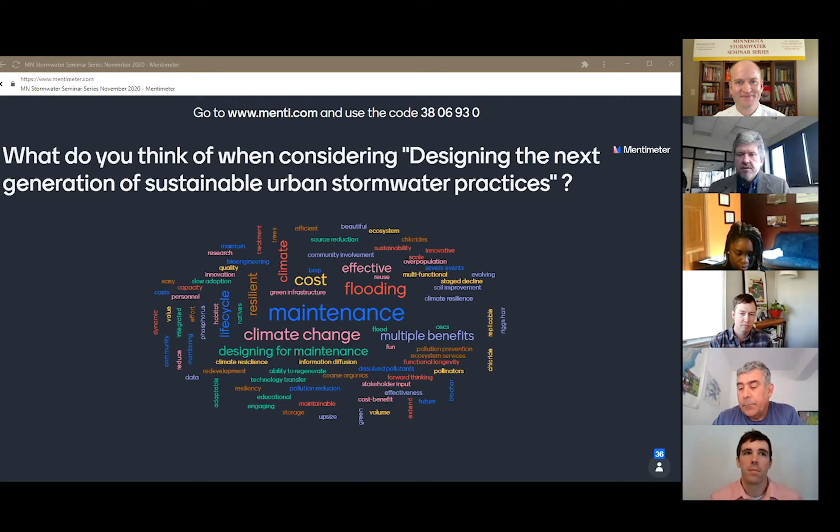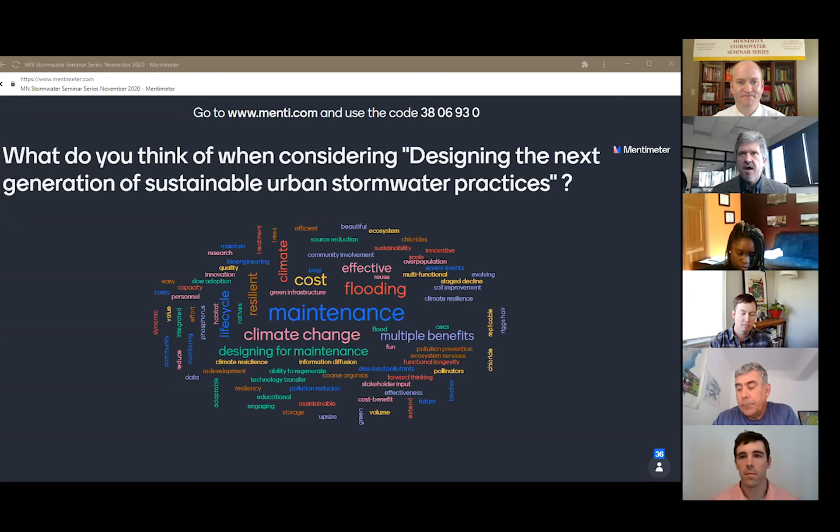Thank you. I think in Minnesota, we're very fortunate to have a very strong stormwater community. We have a lot of technical experts. We have very enhanced planning and prioritization efforts in place. We have good standards. We have good state rules and policies. We have this whole new basin scale planning and implementation effort. We have a constitutional amendment to fund a lot of these things. And so we're really in a good position.

But I think what we lack right now, and what I would really put back to this larger group, is for us to organize and try to reconvene the stakeholder process to help push forward the state of the art, have the local implementers and the designers work with the state entities to help move the technology forward and help Minnesota move forward to protect our water resources that the residents care so much about.

That's great, Jay. Thank you. Della, why don't you go ahead and give us your key takeaway today? Wow. I'll say that is a loaded question.

Just given all the things we've talked about, hearing from Tom and David, and looking at some of your research, Andy, and I think what Jay has said is hitting it on the head, is that we live in an amazing state that cares a lot about our water and natural resources. And they're willing to do what it takes to make sure that it's in a good place.

Now, what we need to do as we move on is think broader and get out of our box and bring more of these people together and different professionals. I mean, when Tom was talking, he was talking about the landscape folks that we need to bring into the conversation.